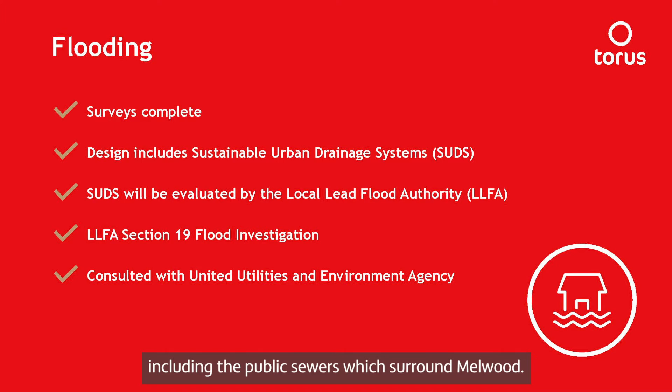We have completed surveys of the drainage infrastructure on site, including the public sewers which surround Melwood. These surveys show that the whole site, including football pitches, are drained unrestricted into the public sewers, meaning there is no rainwater storage on site, and during extreme storm events, rainwater leaves the site quickly in large volumes, contributing to downstream flooding.

With this in mind, each proposed design for the site incorporates sustainable urban drainage systems known as SUDS, which we will go on to explain in more detail.

The use of SUDS will actively reduce the amount of water leaving the site during storm events. This is achieved by storing rainwater on the site and then slowly releasing it when the storms have passed. The use of SUDS will provide a minimum 30% reduction in rainwater leaving the site, helping reduce any flooding in the area.

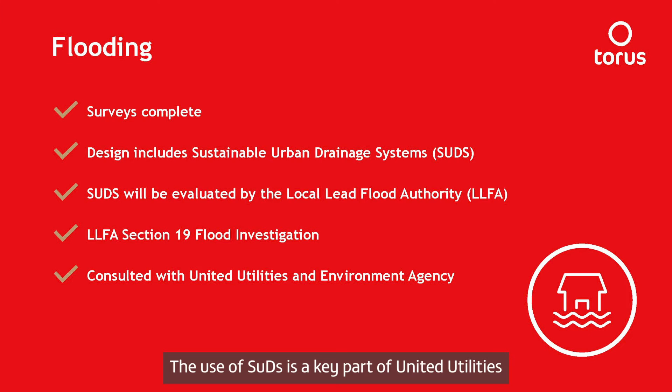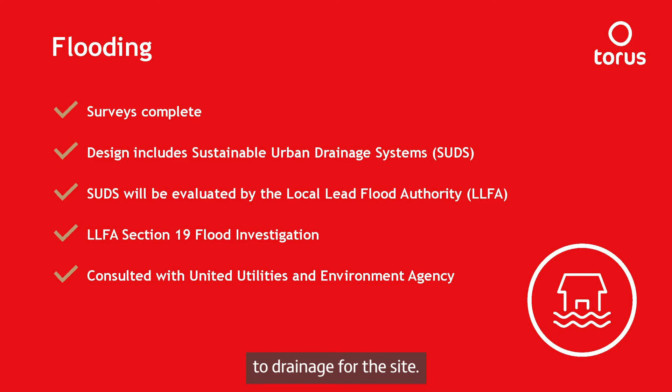The use of SUDS is a key part of United Utilities and Liverpool City Council policies. Both have expressed support for our proposals and we will continue to consult with them on our approach to drainage for the site. The existing Melwood site has a conventional private drainage system where all surfaces, including the pitches, are positively drained by an underground network of drainage pipes.

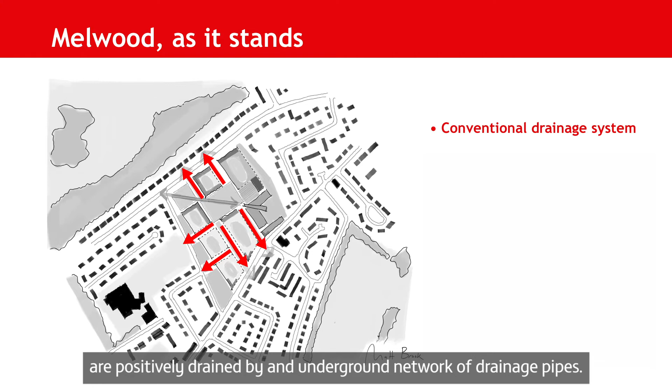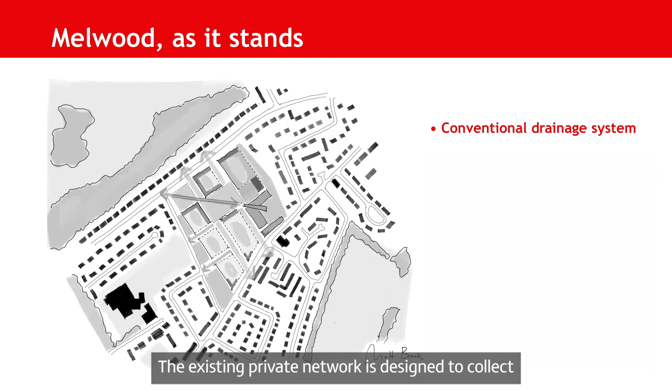These underground pipes connect to the public sewers below Deysbrook Lane and Melwood Drive. The existing private network is designed to collect rainwater and dispose of it off-site quickly. It is not designed to store any water on site.

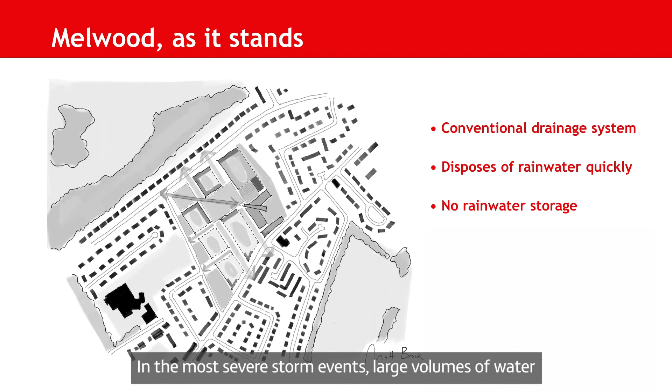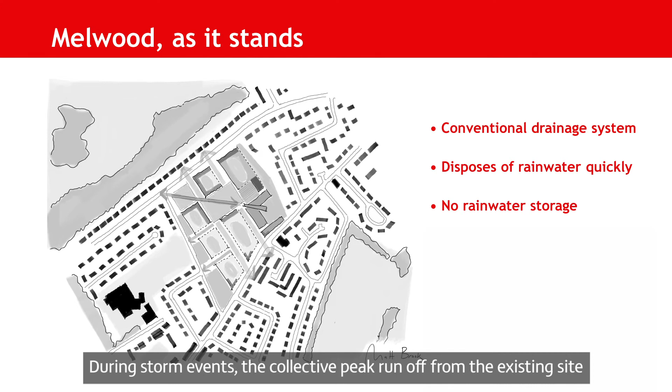In the most severe storm events, large volumes of water discharge from the site unrestricted. This is known as the peak runoff. During storm events, the collective peak runoff from the existing site and the surrounding areas can overwhelm the public sewer network, which can result in flooding at vulnerable low points in the system, for example at the junction of Deysbrook Lane and Melwood Drive.

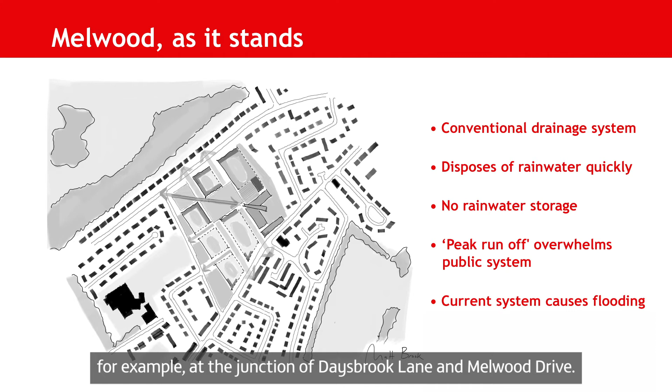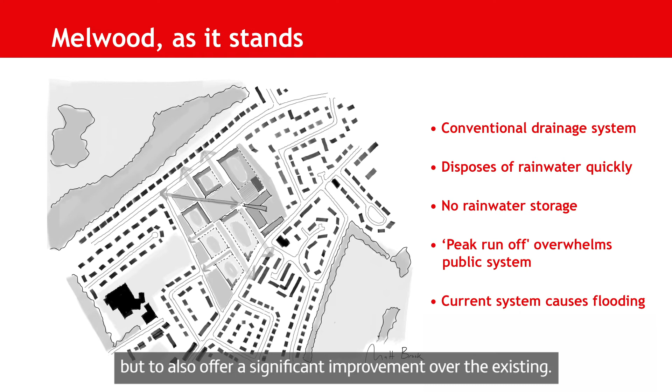The proposed drainage network for the site will incorporate sustainable urban drainage systems known as SUDS. And the principles are to not only ensure existing drainage issues related to the site are not made worse by the development, but to also offer a significant improvement over the existing.

The four key objectives of using SUDS are quantity, amenity, biodiversity, and quality. The primary function of the SUDS on most developments is to reduce flood risk by managing water quantity.

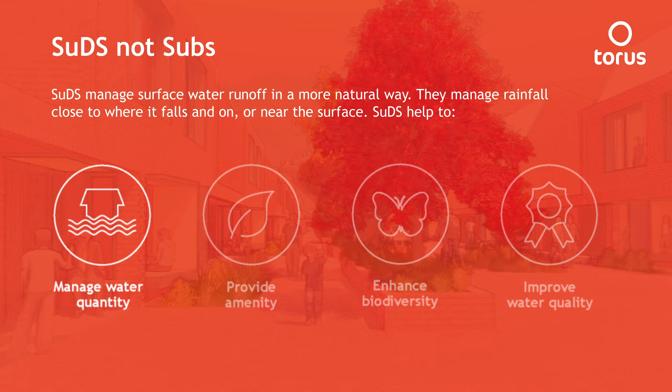SUD systems reduce the volume and speed of water discharging off-site by storing it during storm periods and releasing it slowly. This reduces pressure on the existing downstream public networks and helps alleviate existing flooding issues.

With regards to amenity, as the use of SUDS involves creating natural green spaces to manage the surface water runoff from the site, they also provide beautiful, usable, natural environments for people to enjoy.

For biodiversity, the new green spaces created by SUDS offer new habitats for a variety of plants and wildlife, which can add value to urban living by assisting residents with wildlife connectivity.

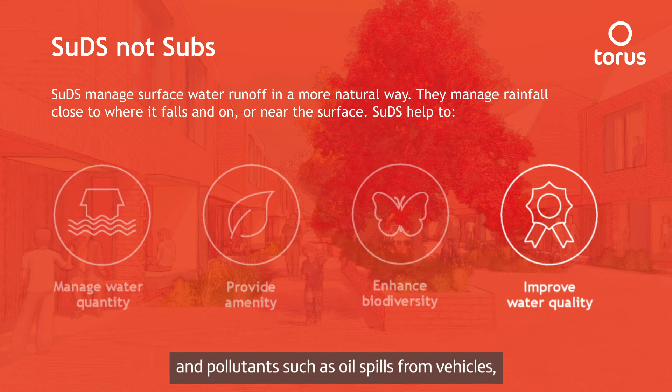And finally, with quality, the use of SUDS provides water quality enhancement over existing by naturally filtering out sediment and pollutants, such as oil spills from vehicles which would otherwise end up in the downstream drainage network and natural watercourses.

The proposed SUDS features for the site consist of swales, detention basins, bioretention areas and permeable paving systems. Swales are dry, shallow, vegetated open channels which convey rainwater from the hard surfaces through the site and typically alongside the highways. They provide water storage during the storm events and improve water quality by catching pollutants within the vegetation.

Detention basins, similar to swales, convey water through the site. However, these are much larger in size compared to swales, as they are designed to provide a higher volume of attenuation storage during storm events.

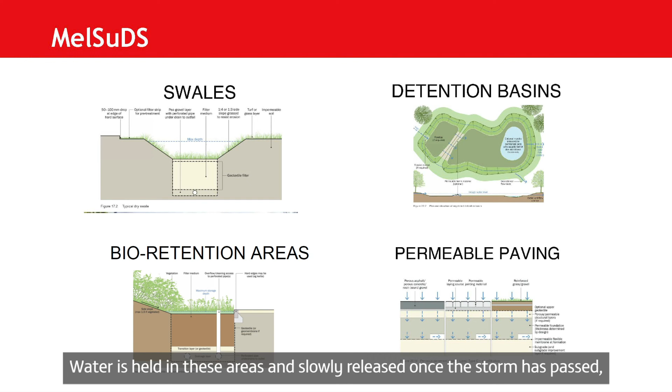Water is held in these areas and slowly released once the storm has passed, although they are generally dry and therefore usable green spaces for the local community to enjoy.

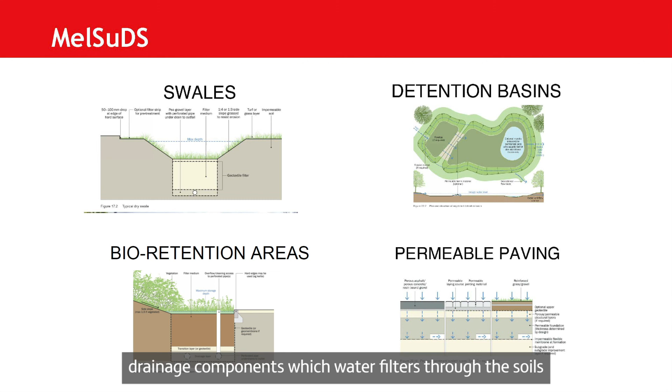Bioretention areas are vegetated areas which rainwater from hard surfaces is drained directly into. These transform standard planting areas into functional drainage components, where water filters through the soils, which sustains the vegetation, and the excess has pollutants removed before continuing along the drainage network before leaving site.

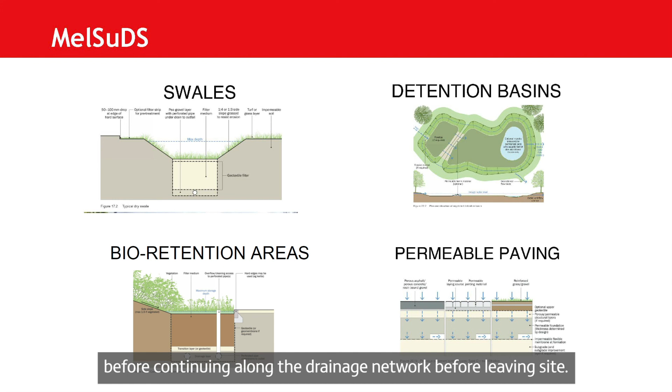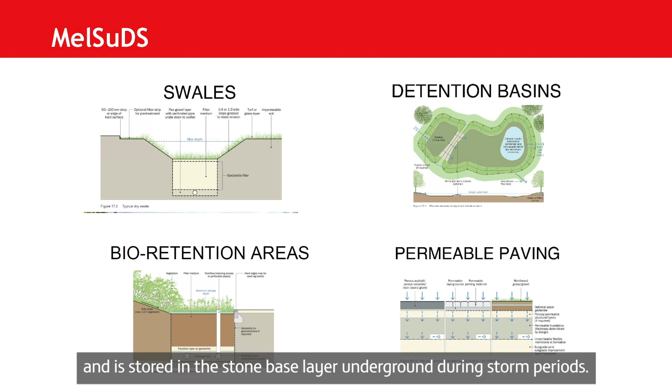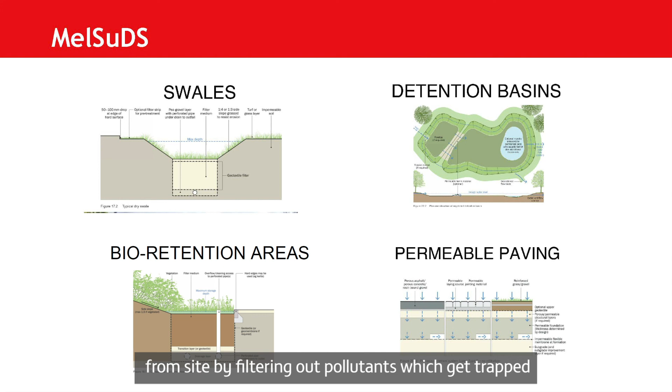And finally, permeable paving systems. The rainwater drains between the small gaps in the pavement joints and is stored in the stone base layer underground during storm periods. Permeable paving also improves the quality of the water being discharged from site by filtering out pollutants which get trapped in the stone layer.

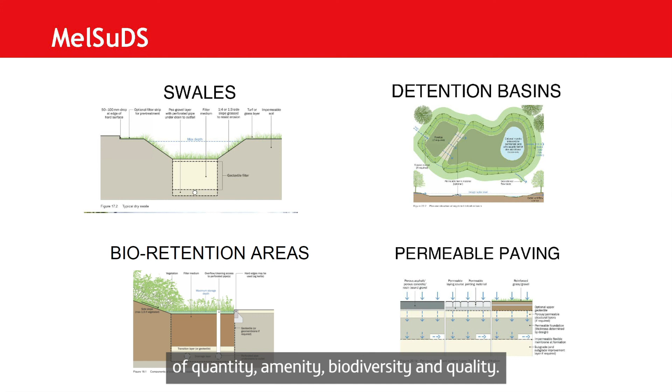The combined use of all these features within the Melwood development provide all of the benefits associated with the SuDS' key objectives of quantity, amenity, biodiversity and quality.